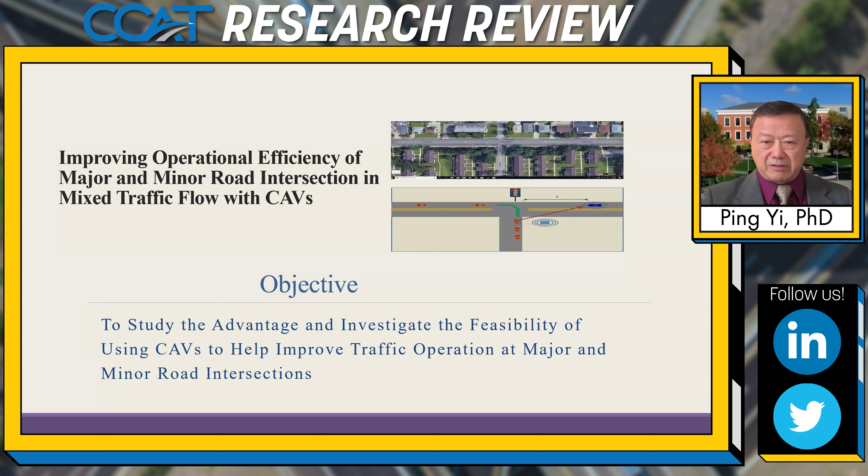Then the results. So here you see the first project, and this project is to try to improve operational efficiency. We study any advantages if we do some analytical or simulation work, and if it turns out to be positive, then is there a feasibility that we can implement in the field? So that's what we did in the first project.

So here's a situation. Most of the intersections where a major road is intersected by a side road, in many cases we use a stop sign or a signal to control the traffic. Now the signals work in most cases on a first come first serve basis. In other words, it doesn't matter how much traffic is on the main line. As long as we have a vehicle waiting on the side road long enough, the system is going to cut off the mainline traffic.

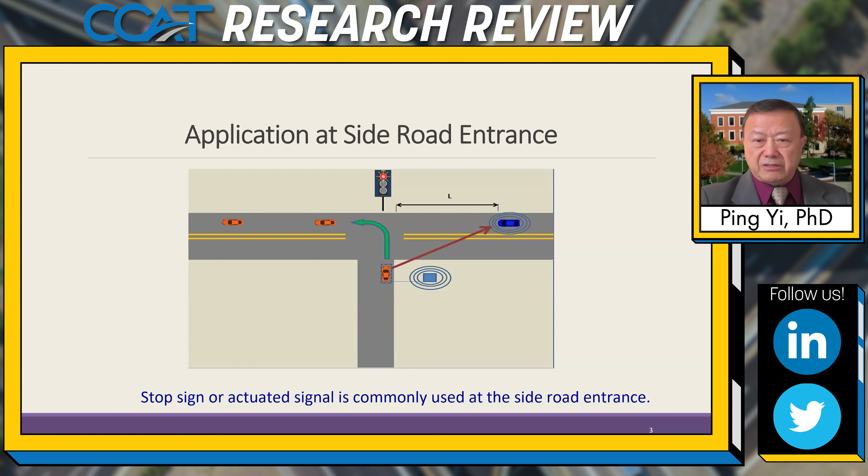So many times we see there are only one or two vehicles waiting, and then the signal will have to switch to allow those one or two vehicles to enter. That will stop everybody. So obviously this is not an efficient way to operate. Next, I have a few cases to show the situation.

Okay, now first one is we have a vehicle wanting to make a left turn or a right turn. In this case, a left turn, where we have vehicles coming going westbound. And even in this case, we're thinking if we have an autonomous vehicle following an ordinary vehicle, OV means ordinary vehicle, can the AV here - you see my mouse cursor, I'm not sure if you can see it -

try to adjust its speed so that we will create the gap from the current T1. You can see here, it's between the two vehicles. And then extend that T1 so that it's long enough for the vehicles waiting on the side road to enter, without the need to flip the signals. So that is the idea.

In this case, there are some technical equations we need to derive, and probability distributions, but I don't have time to go through those in detail. In general, the T1 would have to meet the requirements shown by the equations on the lower left-hand corner. The probability of success in this case will be the probability of such T1, how many such T1s exist there. And the number of vehicles we can help through the AV to enter from the side road also follows this equation, but we'll have a chance to discuss the equations more later.

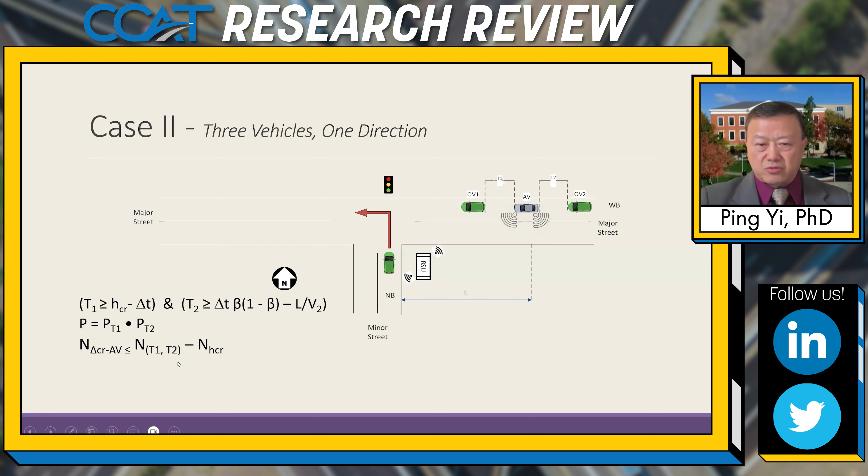Now, next case is a situation where we have traffic coming from both directions.

Now, if the vehicles on a side road just need to turn right, it has nothing to do with the vehicles on westbound. Only the eastbound vehicles will be considered. But we already discussed this situation, okay. In this case, for right turn, it's the same for the eastbound as for case 1.

But now, since we have left turn also, we need to consider both directions. And the equations we discussed for right turns, but for left turns, if you look at the lower right-hand side equations, you can see with our T1 and T2, the existing time headway between the two vehicles will have to meet these equations. And of course, the probabilities here are conditional because for left turns, not only do we have to look at the left, but also the right. So it's a little more complex. Then the probability, of course, will be reduced.

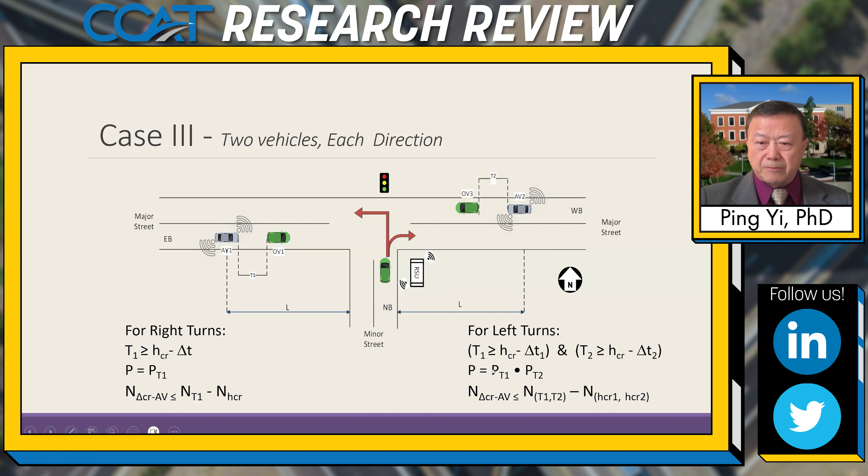All right, now case 4 is the most complex, where we have vehicles in the front and also at the back of the autonomous vehicles, and also the traffic coming from both directions. In this case, the criteria we discussed will apply in both situations.

Now, for right turns, again, those equations we discussed, and now it's just more complex because we have to consider the vehicles that are behind the autonomous vehicles, and we discussed that situation. That is similar to case 2 for left turn.

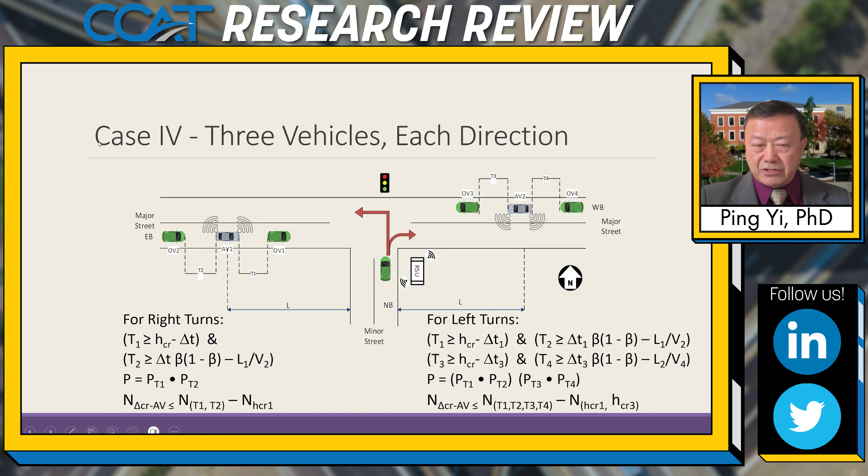Now, for this case, for the left turn, the situation is much more complex, as you can see. All those equations, I'm not going to go over the details, rather just show you the criteria, similar criteria. However, we will have to consider joint probabilities. Therefore, you can see the probability there is really conditional probability. And of course, the number of vehicles that can be created will have to follow this equation.

Now, again, we do not have time to discuss all those detailed equations. If you're interested, you can discuss with me. You can follow up with me after the presentation.

So next, what we did is run the simulation to see if we propose all those models, whether there's any benefit. After that, if the answer is positive, we can do lab testing to see whether this is technically feasible. And if the lab testing comes out positive, then we'll move to the field to see whether there's potential for field implementation. So that's what we did.

Now, on the simulation part, there's a lot of data and everything, we do not have to review it. I just need to report that the simulation came out positive, meaning there's some good benefit. We can take advantage of this idea we discussed.

So then we moved to the lab testing, trying to see whether this is technically possible. So what we do is try to use the equipment in a situation like here.

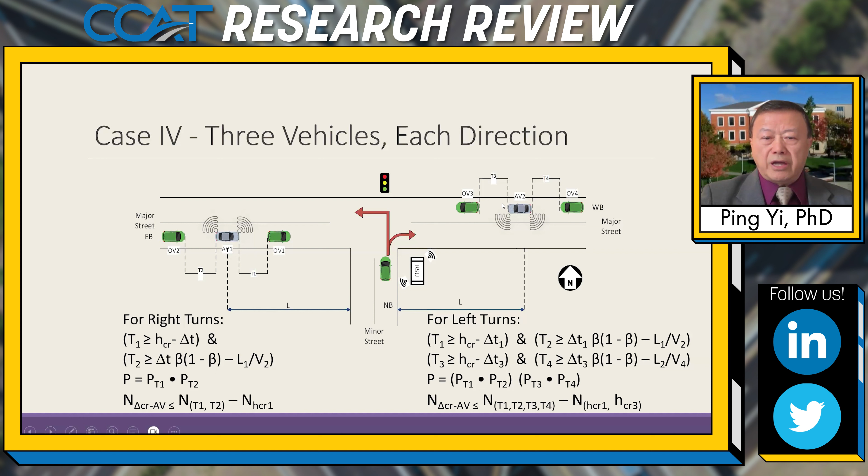And we explored that. We tested the feasibility in the city of Akron traffic engineering, and the results show that it's feasible. We can do that, and so we're very happy.

And then we moved to the next stage, and that is the field test, to see if there's any situation we should consider for possible field implementation.

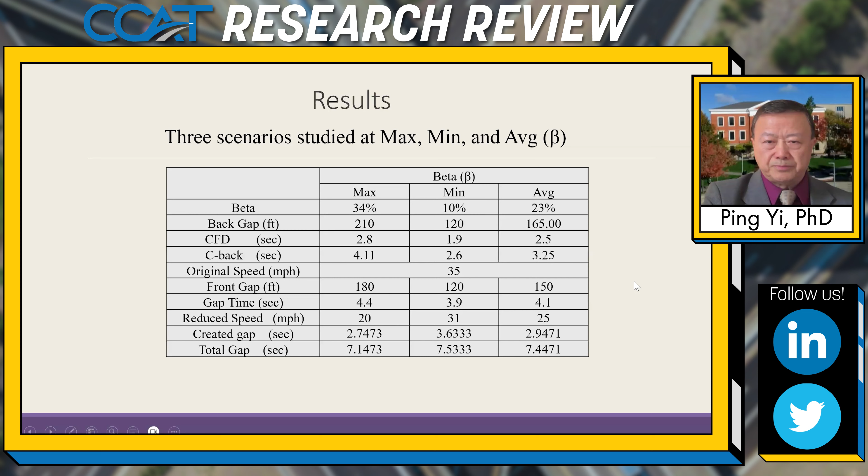So we did all different situations. Here are just some parameters that we used. We did again 2 locations - one in Akron, one in Stow, the city of Stow. Both are in Ohio, in the greater Cleveland area.

Pay attention to this - 60% accepted the additional gap we created, 40% did not accept. We found a possible reason: people may not understand this, it's a new concept. Maybe through education, or over a longer period running, people get more used to it, and the percentage could increase.

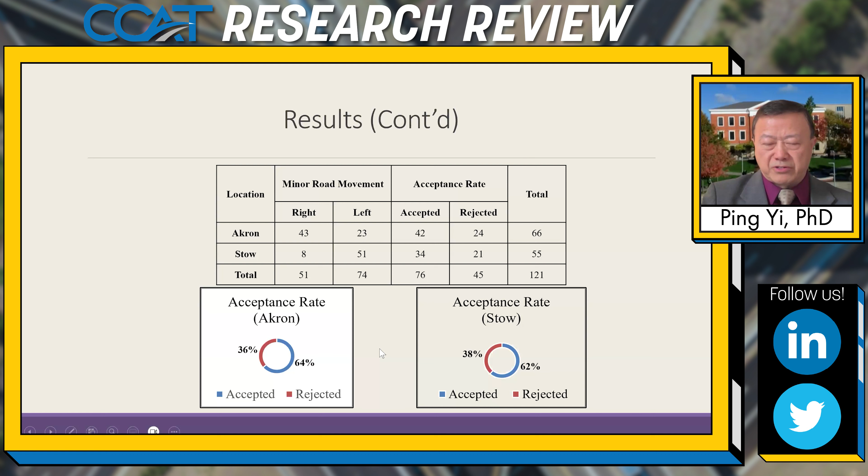But anyway, in terms of the objective, we think we've achieved it. Simulation showed benefits, the lab test showed it's technically feasible, and the field test showed that we do create opportunity for people to follow. In other words, if you do 64 or 62% gaps accepted by the side road vehicles, that can indirectly be considered as reducing traffic signal interruptions by 60-some percent. So that's a good achievement. We think this is a good project.

Anyway, let's move to the second project we did. This project analyzes the possible impact of roadway surface, vehicle condition, and other conditions on the autonomous vehicle fleet. The objective is to investigate roadway, vehicle, braking system, tire pressure, and other environmental factors on the formation of the autonomous vehicle fleet.

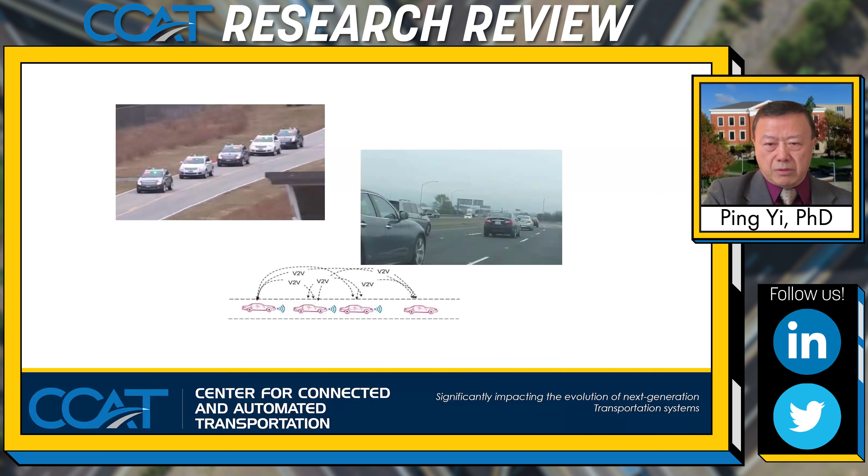For a long time, we were under the impression that when you have an autonomous vehicle fleet, based on many existing reports and other literature, the vehicles look pretty similar, like in this case and this case shown here. But in reality, we think in the future the autonomous vehicle fleet - first of all, fleet operation - there's literature showing advantages if we do fleet operation rather than individual vehicles, because for a foreseeable long time in the future, we will have to deal with mixed traffic.

That means autonomous vehicles mixed with ordinary vehicles, so it's advantageous to do a fleet.

Most cases, we envision in the future the autonomous vehicle fleet will be OD based. In other words, the formation or the fleet will be formed in an ad hoc manner. Vehicles going to the same destination with the same route probably will be formed in a fleet. So if that's the case, then we will have different vehicle models and also vehicle conditions, like tire conditions, tire pressure, braking system, power, all those things.

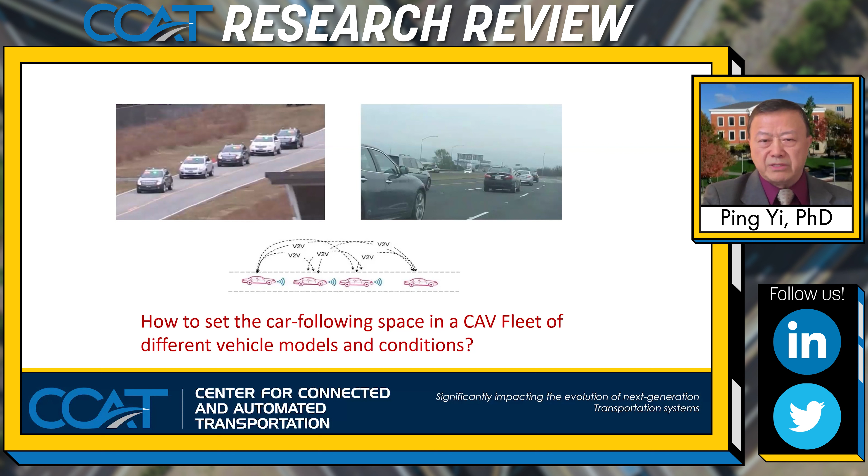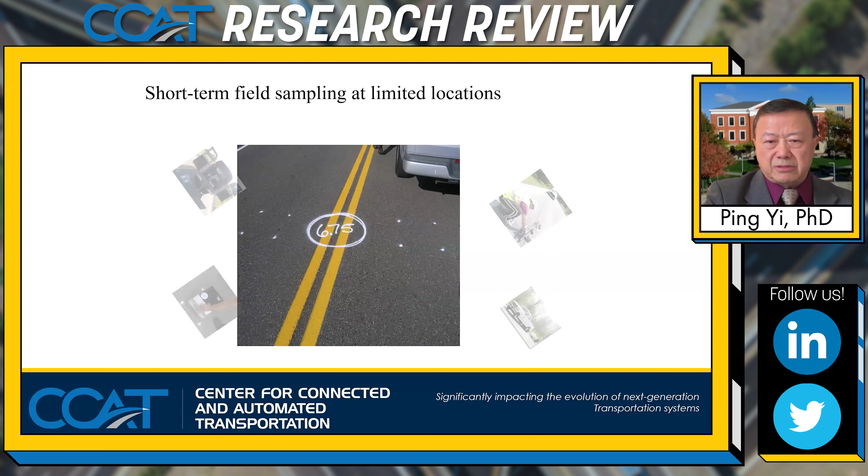Now, how do we determine how they follow each other? That is a question we're trying to look into, if you consider the pavement, the weather, and the vehicle conditions. So two focuses: one is to understand the impact of all the factors we discussed, specifically pavement and also the vehicle tire condition. The second issue is we have to build a model that is able to handle all those different disturbances, the factors. First of all, we did some pavement studies to find out the effect of that.

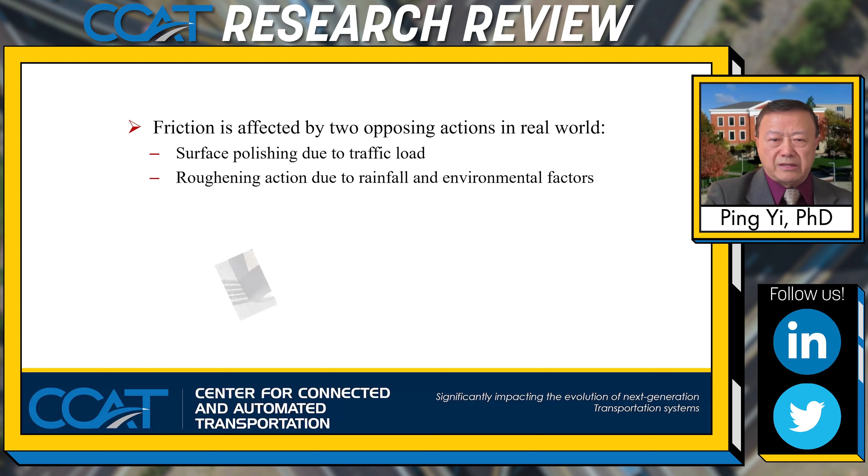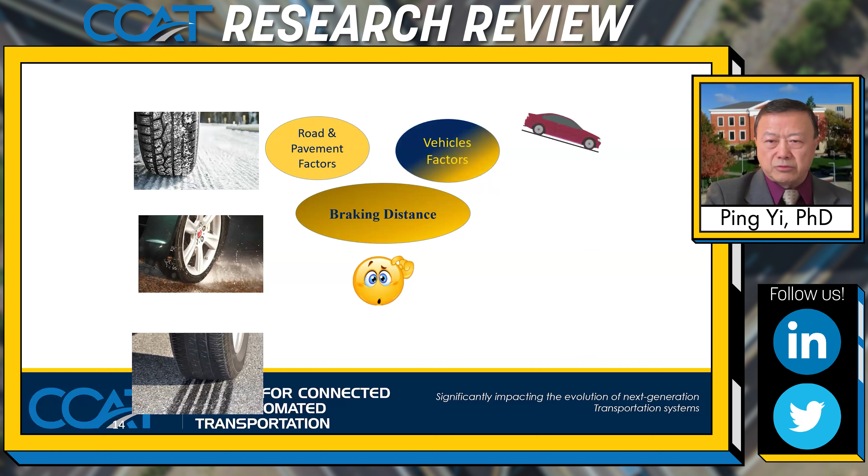We'll just go quickly on this. Through the experiment, we found the friction coefficient is affected by a lot of things, including the weather and the rain and so on. And also the braking distance is related, of course, not only to the pavement surface condition, the friction coefficient, but also the internal tire pressure. Lots of factors affect the braking effects.

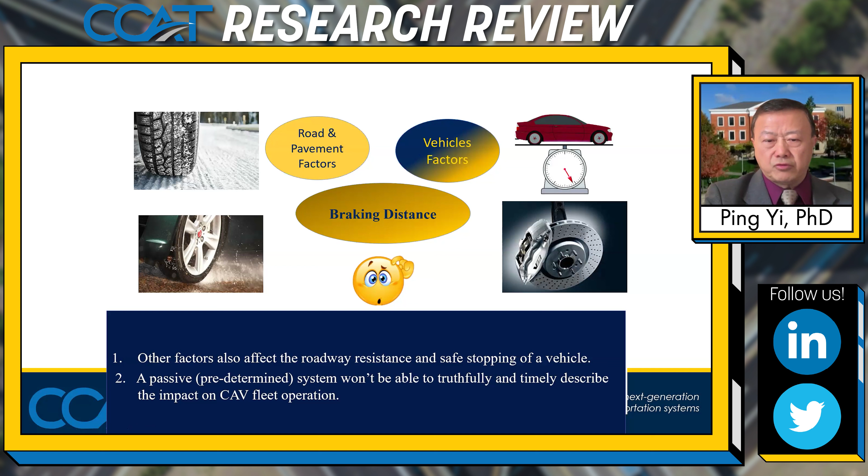From doing the above, we developed the understanding that if we use predetermined parameters to handle the autonomous vehicle fleet, it will not be enough because the conditions change. So we have to do a time-dependent model. First we start from building the basic equation.

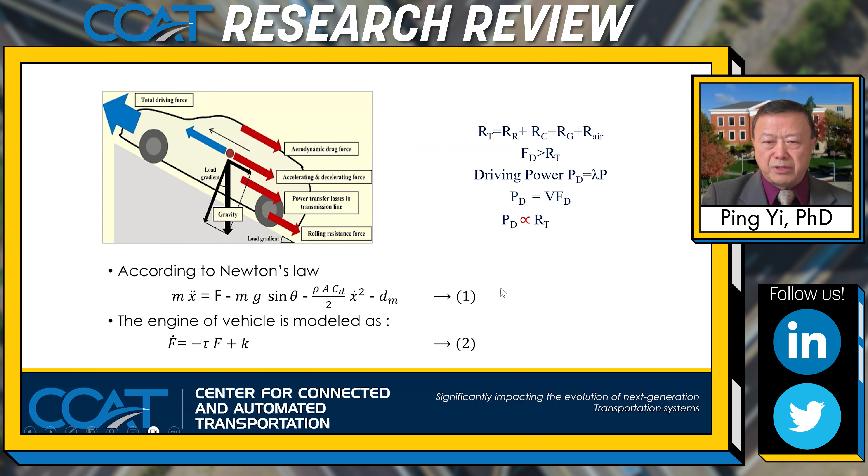You can see Newton's law is used here. This is the main equation. The second equation is the engine and power, the force equation. If you're familiar with mechanical engineering, you know the equations. Starting from here, in the whole powertrain we have a simple chart to show the breakdown.

Out of 100% of tank energy, we have like 3% or 4% for air drag, aerodynamic drag, and also rolling resistance 4%. The numbers in parentheses mean on highways, and the numbers not in parentheses mean in the cities. But if you pay attention, in most cases the vehicle road load is needed to cover the aerodynamic drag, the rolling resistance, and also the grade, the slope.

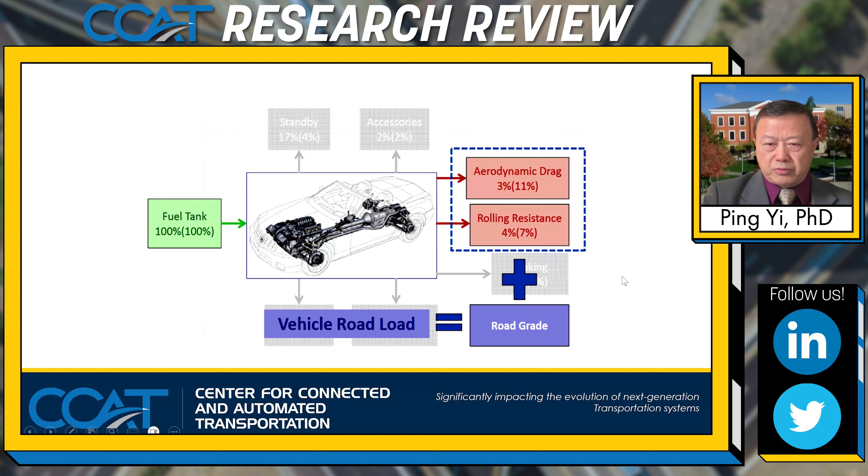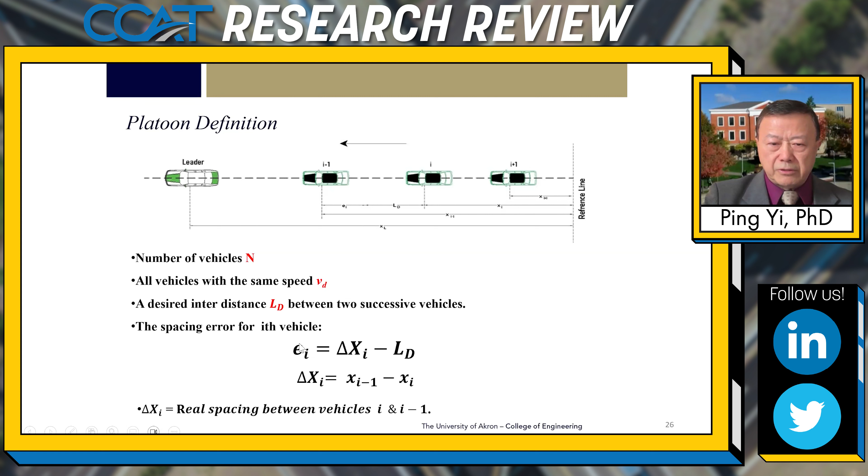And then the vehicle fleet, it's a platoon. We all understand what platoon means. Basically we're trying to follow the leader, and in the platoon each will have a certain distance to follow. Ideally everybody follows with the same gap or same distance, which is LD. But in reality there's always some errors, plus and minus, as you can see, the error EI here.

In terms of the control policy, first of all it's called constant spacing policy. Constant spacing policy says that if we want to maintain the error zero, in other words, we want to absolutely maintain the spacing between any two vehicles as a constant distance. Now this one we know...

...is not the best way to do it, simply because it can be very costly and not efficient either. Because we all know when you travel, if your speed is low, you really do not need to have a large space there, but when the speed is high, you need a larger space. So either you waste spacing if you keep the LD very far, or if you make it small, then it will be unsafe when you come to like 60 or 70 mile per hour speed range.

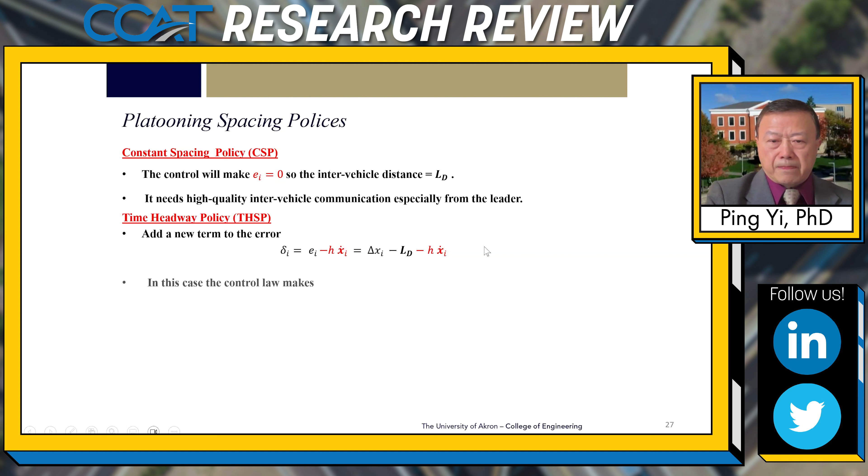So the next type of control policy or law is what we call time headway policies. That says if we introduce some speed-related errors to the error term, as you can see we added the error term in the right, then this one will change based on its speed.

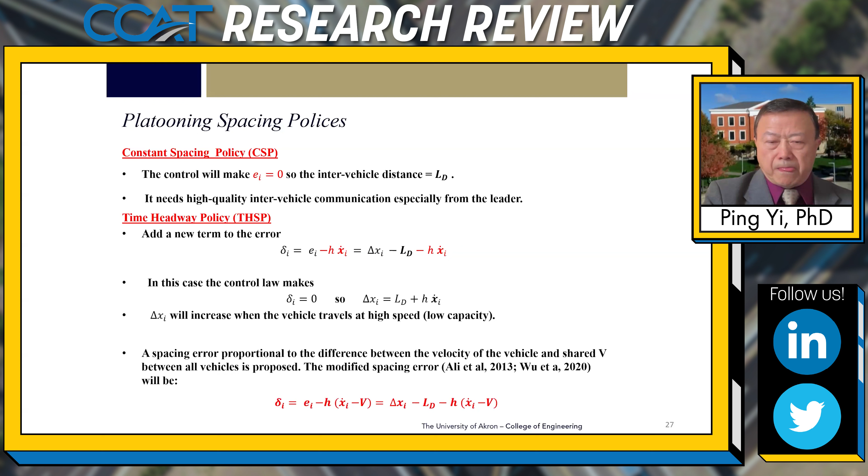Now, so we continue on this. We don't have time to do much discussion on the detailed equations, but we use this control law, the time headway control law there.

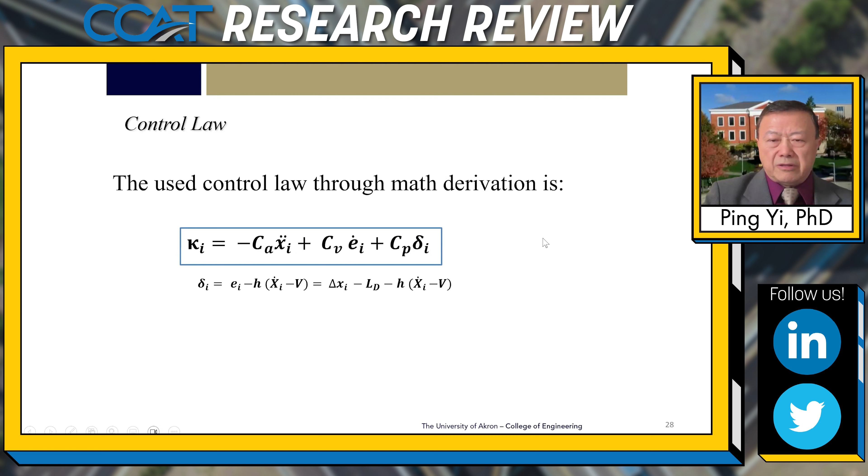And then we work on the basic equations, and we come up with these control law equations. This is the basic equation we use to develop the functions. In this equation, K or kappa I is the engine input, which you can directly understand as how much gas you give. And then we have the C's, 3 of them. They are the parameters that need to be calibrated.

Now, if you start writing it to draw the block diagram for any vehicle, an ICE vehicle, the block diagram will look like this. If you're in electrical engineering or mechanical engineering, you have to follow this diagram. This is for any vehicle, i-th, you can see that, just an example.

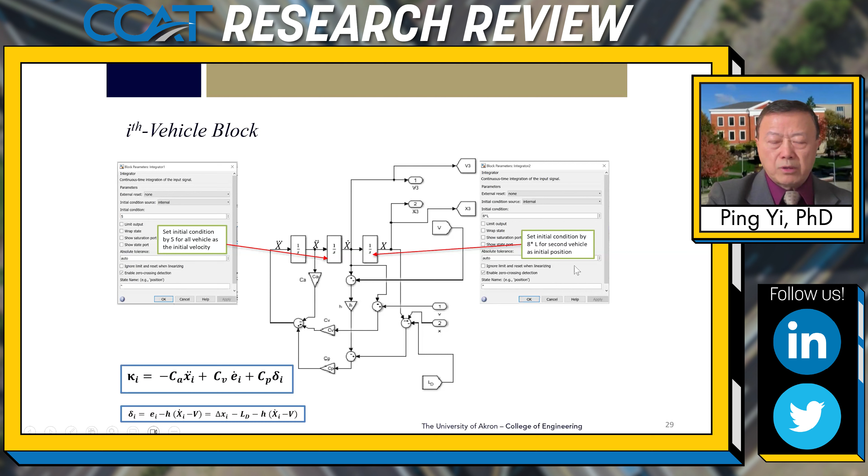Now, one condition for stability can simply be understood as maintaining a system from going out of control. Any disturbance to the fleet will somehow be suppressed and come down, rather than be amplified and finally become out of control.

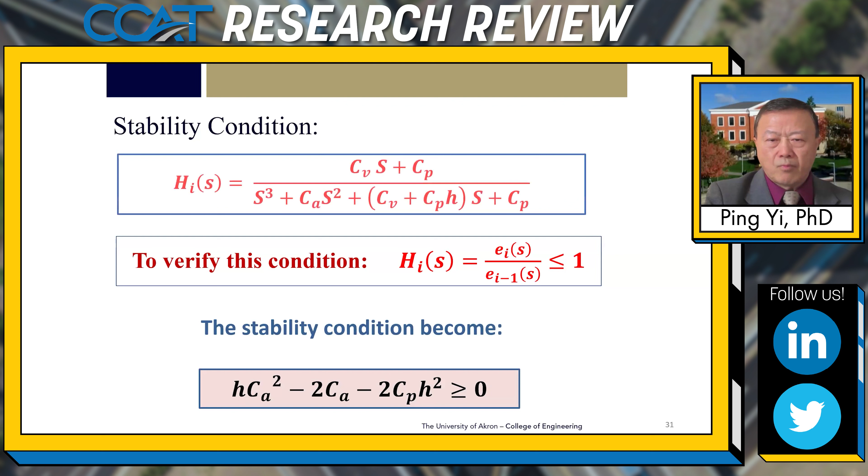So this is the equation we'll have to maintain in order to maintain the string stability. In order to achieve that, this is the criteria for stability. So the relationship among these parameters will have to meet this criteria. And we did a lot of work to calibrate the parameters.

So that's another parameter. We do not want this oscillation to last very long or forever, and that would be the worst case, or even explode.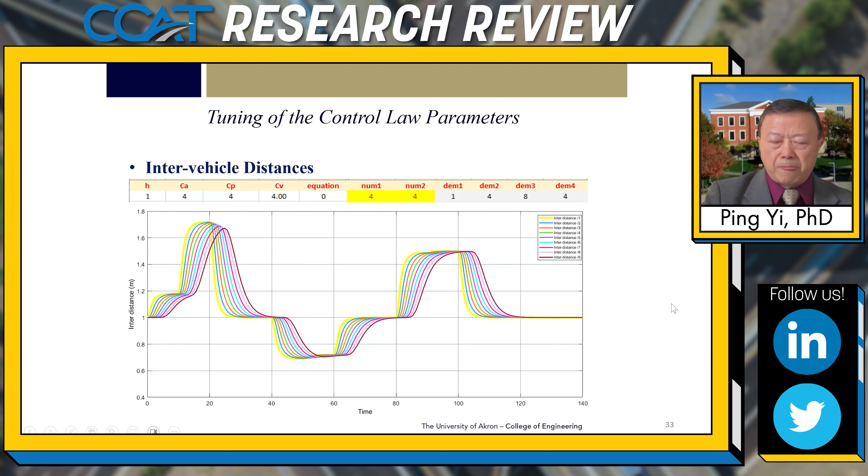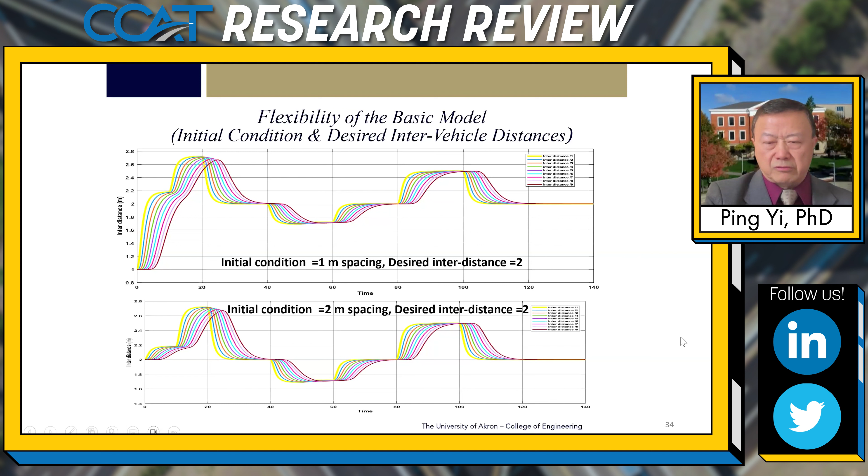Okay, and we changed the situation. We changed the initial spacing. Initially, the vehicles start with 1 meter separation, and then we change it to 2 meters separating them. But we have a desired spacing set at 2, so you can see they will come to the final 2 meter vehicle spacing that we set, after some fluctuations or oscillations.

Now, this is a situation where we do not set a common speed for them, but just let themselves adjust. You can see we have this kind of change, but the one on the lower part is if we set a shared speed for everyone to know. So there's a target, and that will help them reduce the oscillation magnitude.

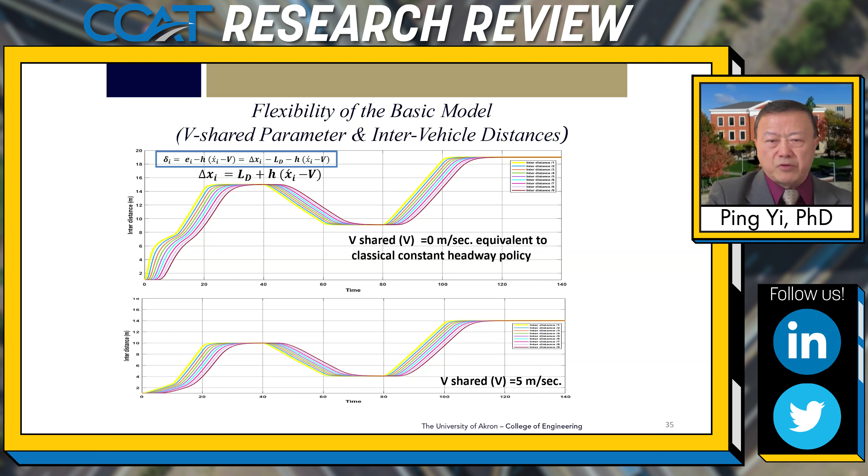So this just shows some simulation results. Now, next, I want to say that, remember, the objective of our study is to consider the impact of other factors like pavement, tire pressure, weather, and everything. So we will have to consider the specific vehicle condition, and redo the equations by adding a lot of other things in there.

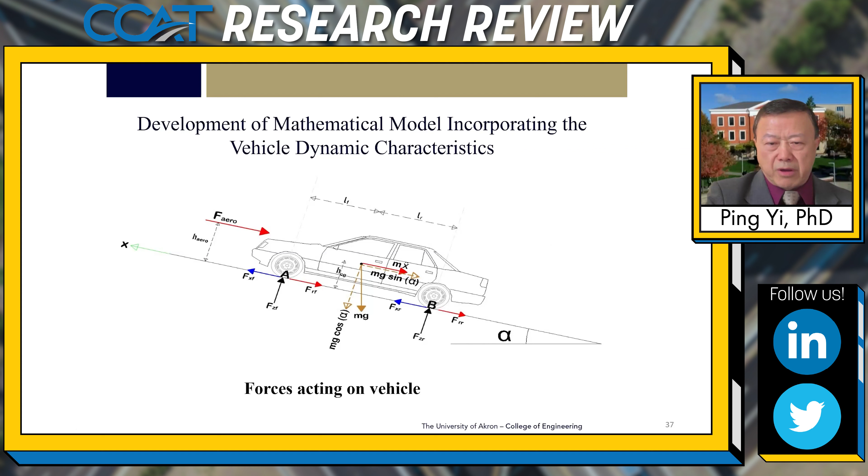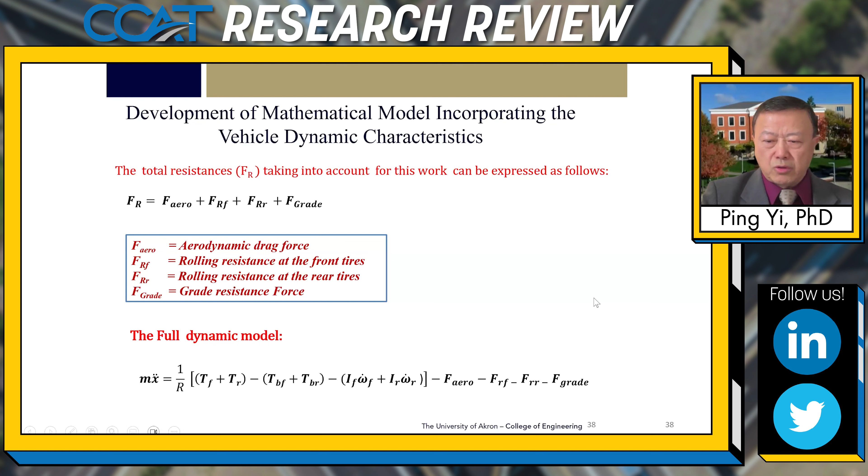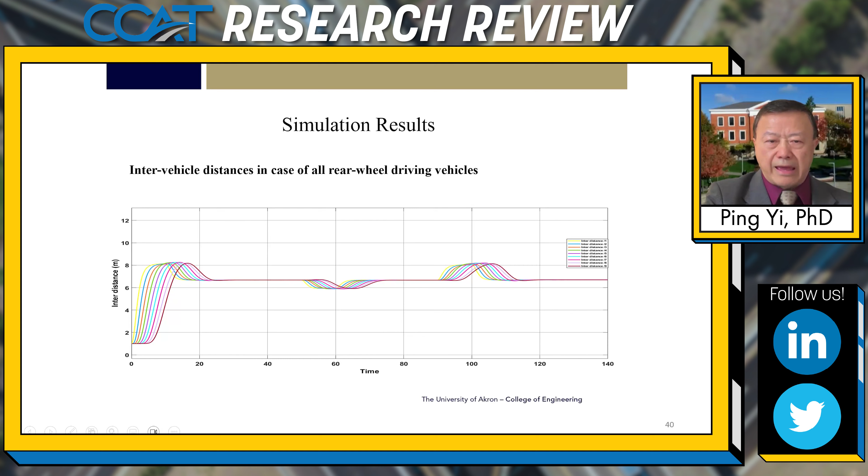The reason vehicle 3 might take a quicker brake is possibly there's a pothole. We're just envisioning the situation. If there's a pothole, the vehicle 3 detected that and suddenly takes a quick brake, and so that caused a little disturbance. But you can see that the system is able to come back.

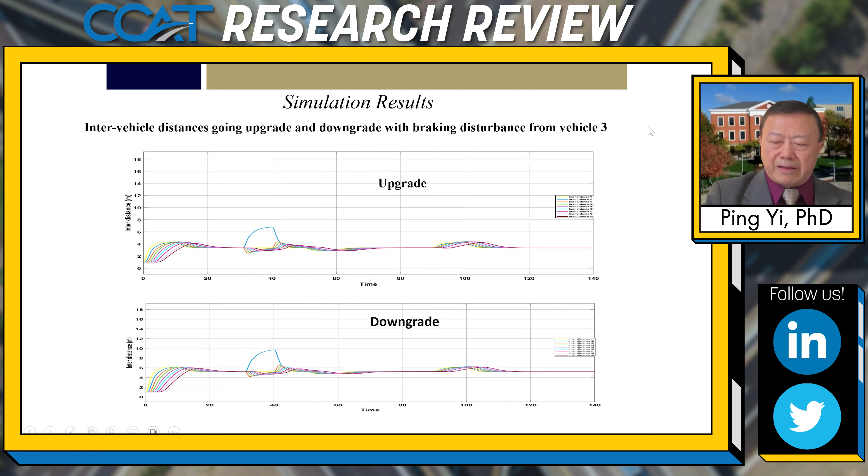So we have a lot of other situations considered. But anyway, just want to show this picture again: with this model, we have a lot of different places to incorporate the changes in the different factors. So that is the second project.

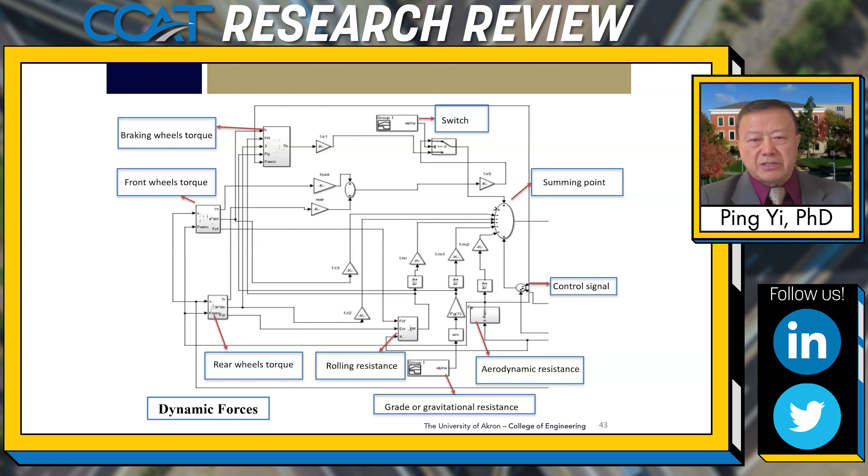And then this is the situation. You're familiar with the setting because in the first project we discussed, this is a gap selection. So whenever you come to an unsignalized intersection, you can see it doesn't matter if you want to make a right turn or left turn—it's a lot of decision-making process there.

And in fact, we all know, we all drive, right? When traffic is heavy, it's really hard even for us, for young people, to make a good decision and not affect the mainline traffic much. So this is very challenging.

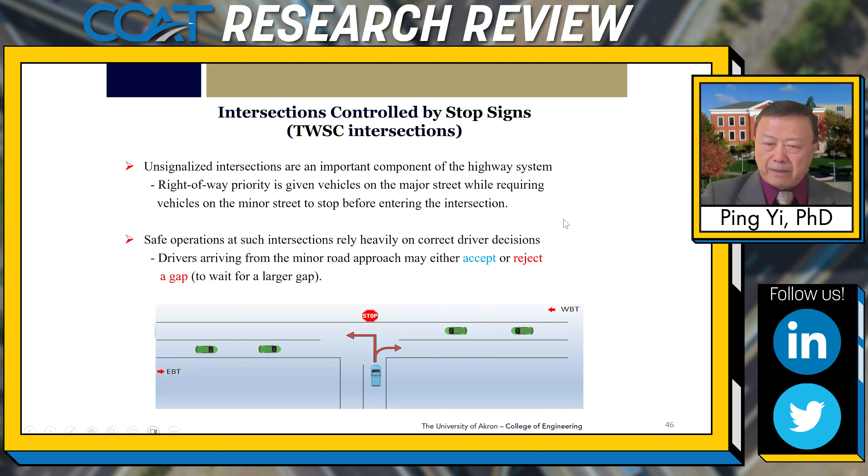Now, our research objective is to develop a safety warning system for older drivers, 65 or above, and we will discuss how we try to fix the driver's age in this category, so that the system provides information for older drivers to avoid unsafe gaps. We will discuss the design philosophy when we discuss the technical part. The technology we use is V2I, and plus, of course, connected vehicles in a system.

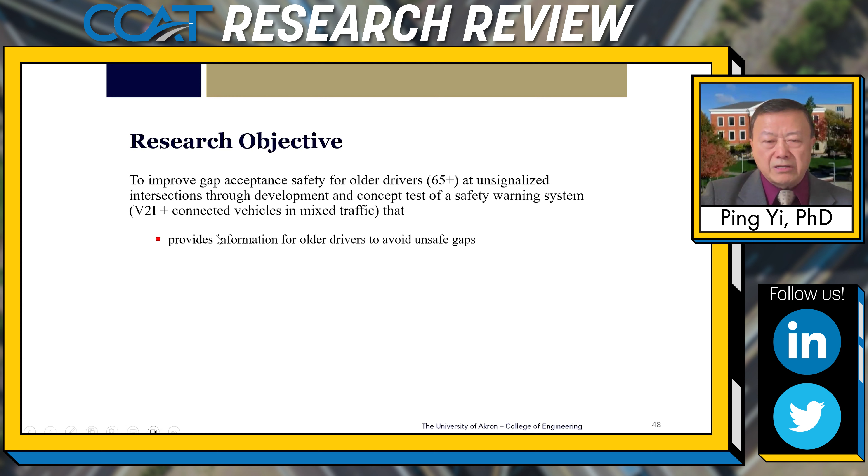But there are two situations: a controlled situation and an uncontrolled situation. The controlled situation is all the vehicles on the main road have V2I capability, with a central terminal located at the intersection.

On the uncontrolled situation, nobody on the main line traffic has this capability, so the system will have to measure it. We'll install traffic sensors to measure the approaching speed of vehicles from either left or right or both sides, so the system knows the speed and location of vehicles coming to the intersection.

Here is a graphic representation of the control situation. When the minor, an older driver, approaches this intersection, if it's a control situation, any vehicle in the vicinity already establishes communication with the central terminal. So we know how much time is needed for this vehicle to reach the intersection, and the system will make a decision. If the time gap is large enough, we do nothing, and the driver, depending on their decision making, will start to enter the road, turning left or right. But if the distance is not enough, the system will issue a warning to the driver inside the vehicle.

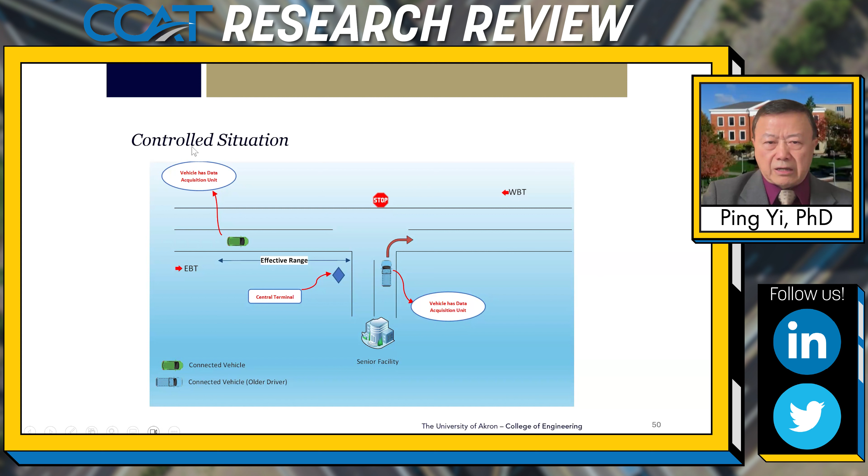The uncontrolled situation again: all vehicles on the main line are not V2I capable, so we'll have to install detectors to measure the approaching speed. Shown here is only one side, but we actually did both sides, for simplicity. Graphically we only show one side.

So the system will detect the approaching speed of the vehicles and communicate with the central terminal, which will know how many vehicles are approaching and their location when they pass the detector. The detector cannot be too far from the intersection for two reasons: one is the communication range, since we use Zigbee to communicate the data; the other is we do not want too much chance for variation in the approaching speed.

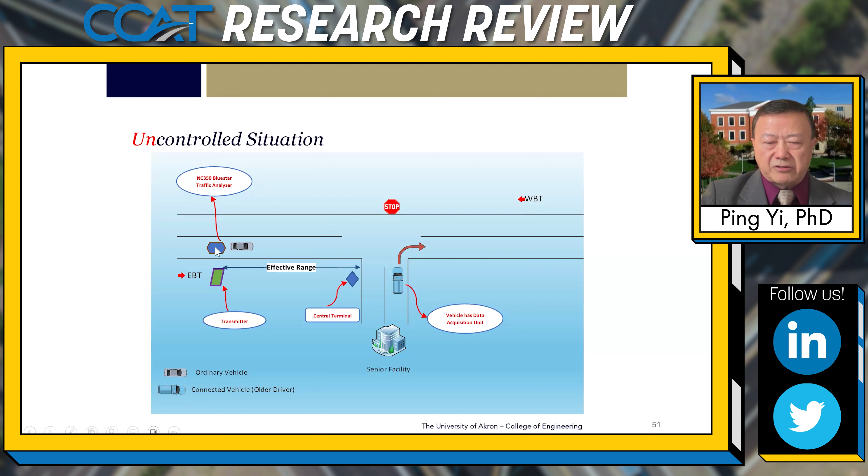So we did a field test in this situation using the detectors to handle these uncontrolled situations. Now here's a video to show the simulation.

Dr. Yi, the audio is not playing. I'm not sure if that's intentional. Oh, really? Not playing? Yeah, you might have to pause your share and then select share audio.

It's a very short one, but maybe we'll have time to come back to that. Basically the system will have a sound to warn, don't turn, in certain situations. And if the system does not give you the warning, then it's your own decision making. The reason we do that is we do not want to carry the liability issue here, because the system we're trying to develop is a warning system for an unsafe situation.

Let's see... no. Anyway, so we have to move ahead.

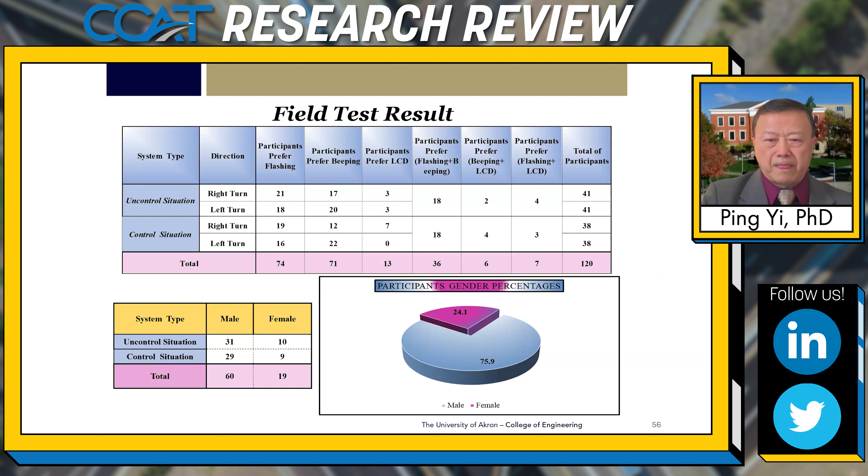Anyway, the last project is based on the previous project on an older driver safety warning system. When we approach older drivers and mention the level 2, level 3 technologies, many of them do not have any idea what it is. Some of them know what the technology is, but they're afraid of using it. So in general, even though their vehicles - just some of them, very few - have these nice features, they do not understand them.

They turn them off. So what we did in this project - by the way, this is a joint project with the University of Michigan - the other group in Michigan does the training for the students, and we are doing training for the older drivers because of our experience in the previous projects.

So the objective is to increase the awareness of these technologies for older drivers, so that they'll be more willing, first of all, to understand the technology, and the next step is for them to use it to enjoy the benefits - not really designed for them, but still beneficial.

Based on that, we designed a questionnaire, and we accumulated possible technologies from different places and categorized them. You can see the newer features of vehicles - the level 2 or level 3 technologies are usually on newer models, and many of them can be switched off and on. Some simply provide an alert, and some physically perform the correction - for example, lane tracking will physically turn the steering wheel. But none of the features will actually completely take over.